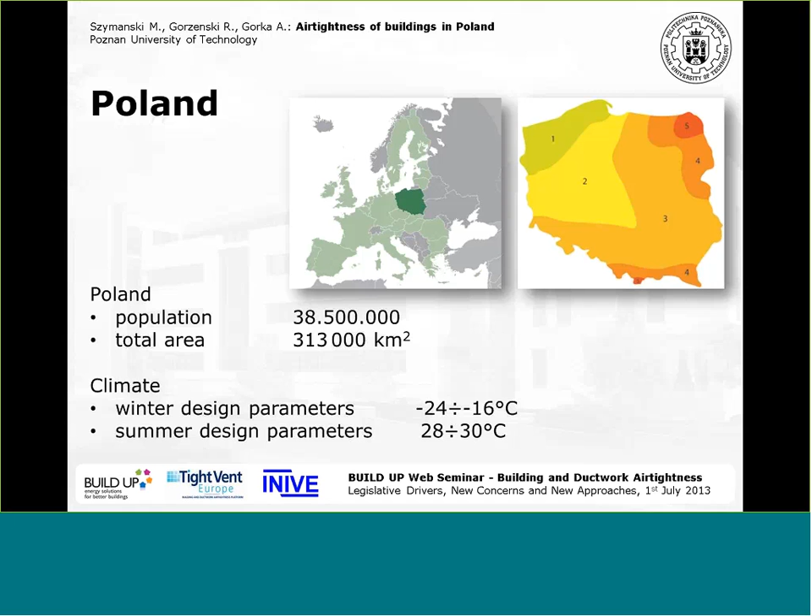We are from Poznan, that's the western part of Poland. The city has about 600,000 citizens. We represent Poznan University of Technology, which is one of the biggest Polish technical universities with more than 20,000 students. We work in the Institute of Environmental Engineering.

Our staff took part in the IEA Energy Conservation in Buildings and Community Systems, that's Annex 36, in the years 1999 to 2003. And also Polish EPBD calculation methodology was developed in 2008 in our institute.

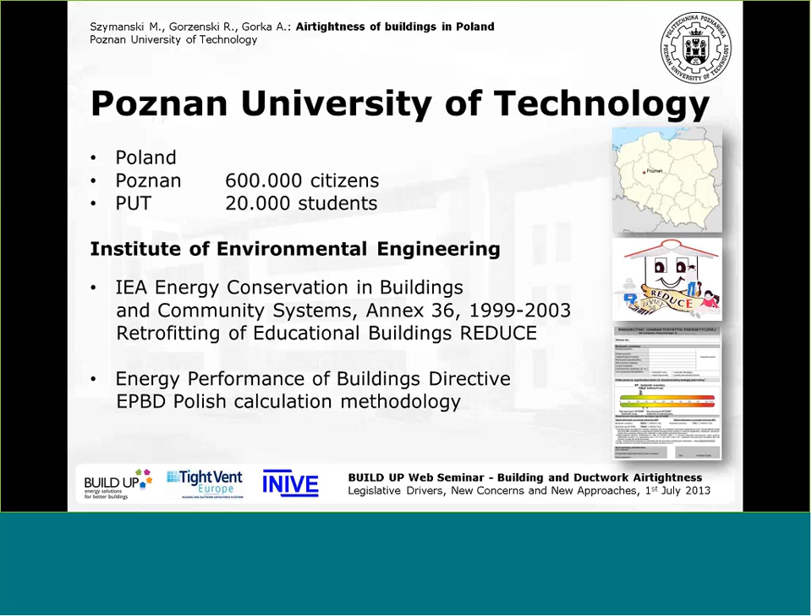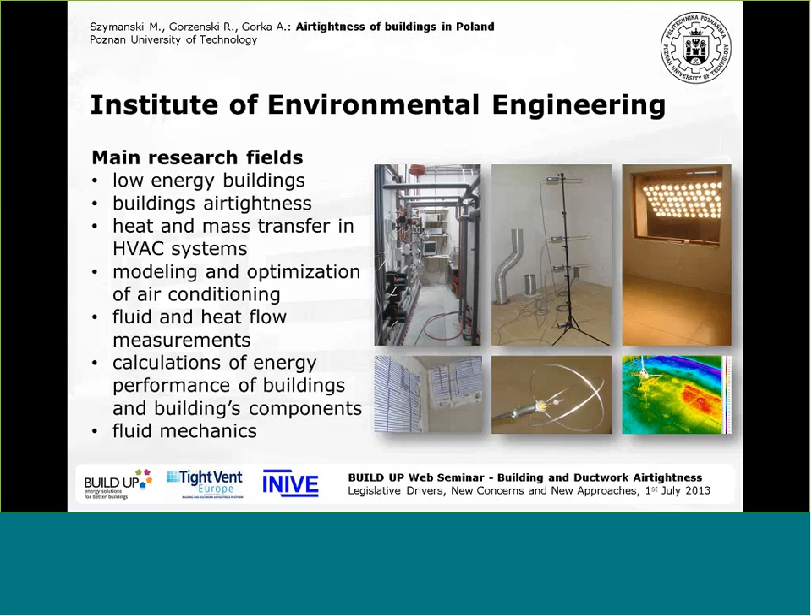We carry out basic and applied research in the areas of low energy buildings, building airtightness, heat and mass transfer in HVAC systems, modeling and optimization of air conditioning, fluid and heat flow measurements, calculations of energy performance of buildings and building components, and also fluid mechanics.

Airtightness measurements which we conduct are often done by the Passive House Center, which is a part of the Institute of Environmental Engineering. It's co-funded by the Polish Passive House Institute. The most important tasks of the center are courses, trainings, energy performance calculations, and measurements.

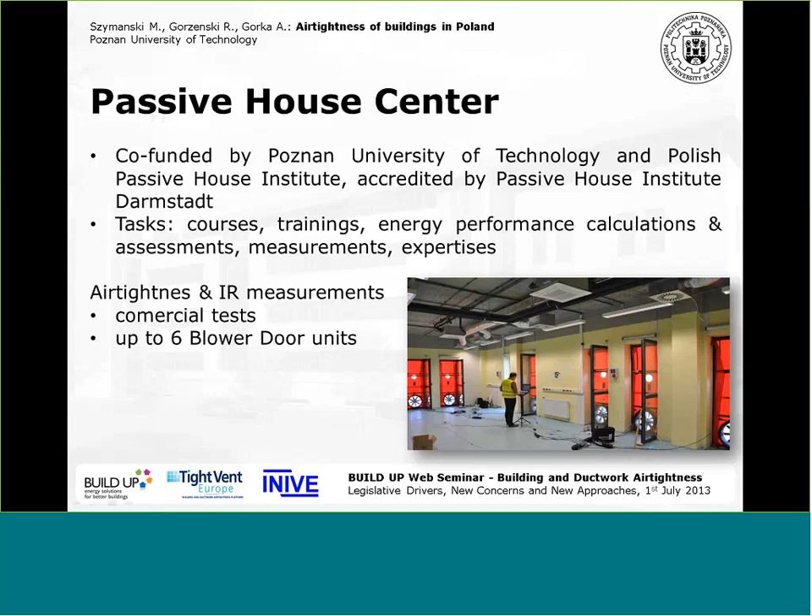Although we do commercial tests, indeed we are not a typical testing company. Airtightness tests are only one of many other activities we undertake. In Poland till 2008 we had no special requirements, which you could observe in a table presented by Rémi. I mean requirements for airtightness of whole envelopes.

Since then, together with EPBD implementation, new building codes were set. Measurements at the moment are not required, they are only advised. But the N50 values are required. That means that no one has to measure airtightness of the building, but if someone measures it, the N50 value should be less than 1.5 air changes per hour for buildings with mechanical ventilation and 3.0 air changes per hour with natural ventilation.

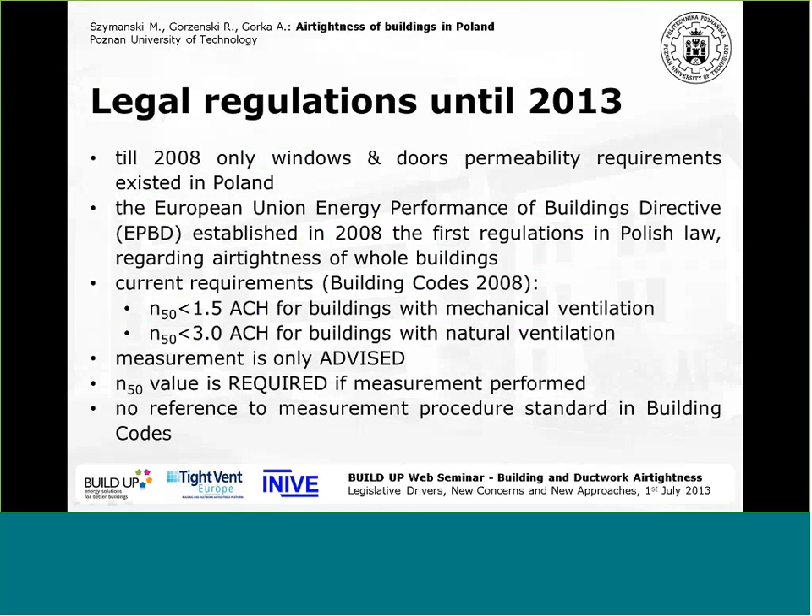Building codes which are planned to be published in 2014 will not change the N50 limits. It will make the standard EN 13829 a reference norm for airtightness testing. But a step backwards is that the N50 values will be only advised, no longer required as it is today.

There are some other guidelines, of course, concerning building airtightness in practice. One of them is the passive house standard. The number of passive houses in Poland is very low at the moment, no more than several dozen, and it is growing very slowly. This year, the National Fund for Environmental Protection and Water Management introduced a new program to

promote low energy buildings. And one of the obligatory requirements for gaining subsidies in this program is to test the building airtightness, and N50 should be less than 0.6 or 1.0, depending on energy standard of the building. There are two standards, 15 and 40 kilowatt hours per square meter a year. Although there is a statement in this fund's rules that the airtightness examiner may be any company which uses appropriate instrumentation.

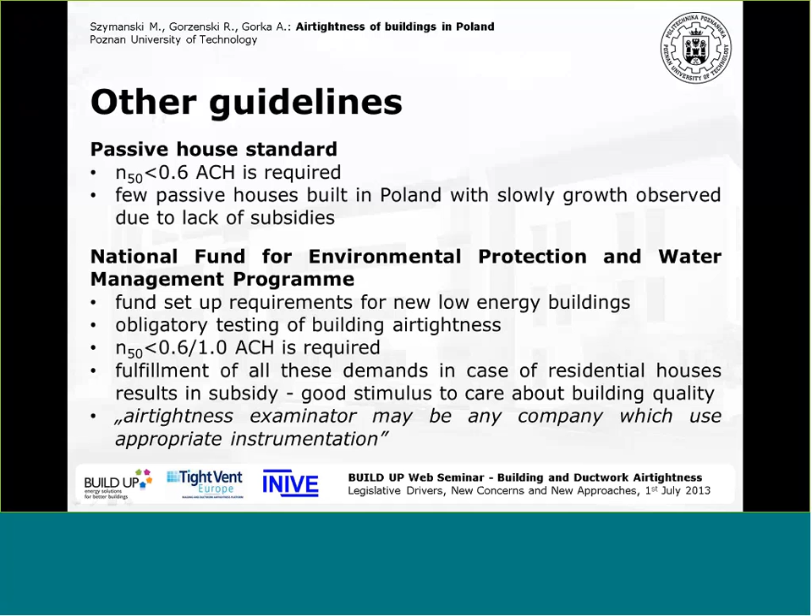And now a few words about testing companies. There is no companies association in Poland, and there is no real communication between these companies. We have no requirements for testers stated.

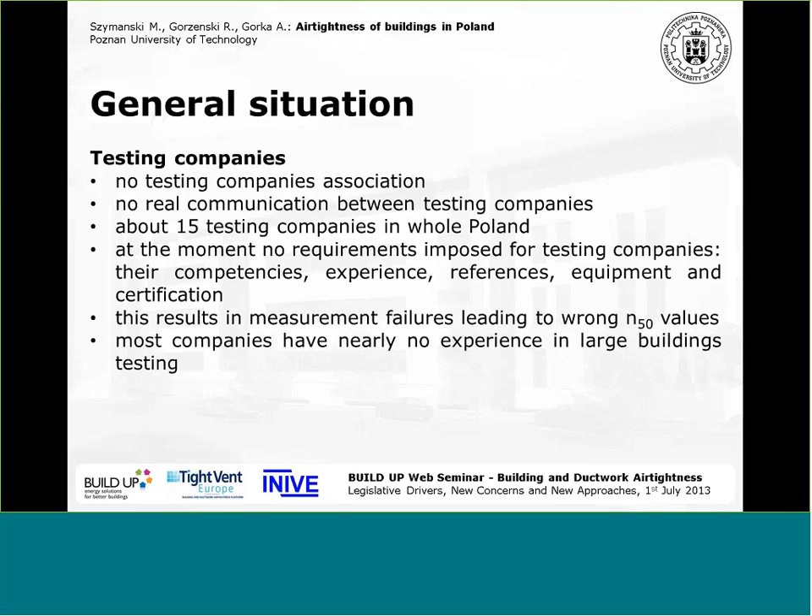They very often have no competencies, knowledge and experience. It often leads to failures during the tests and wrong N50 values as a result. And the worst situation is with large buildings, where there is absolutely no experience at the moment. A good example of such a situation is an airtightness test made in a large aqua park in Poznan, in our city. We were asked by investors to observe the measurements done by the company with complete lack of knowledge in the field of large buildings testing.

There were important measurement mistakes done, like, for example, transzonal uncontrolled flows during the test because of no simultaneous pressurization of adjacent zones. In other words, flow measurement was performed with unknown accuracy. The air handling unit manufacturer didn't provide any reliable data in this matter. The testing team was not familiar with the building and its design. Tests were conducted with several ventilation systems operating, and the systems were not involved in the test. And we found big differences in N50 results, like, for example, at underpressure 1.9 changes per hour and 3.0 at overpressure.

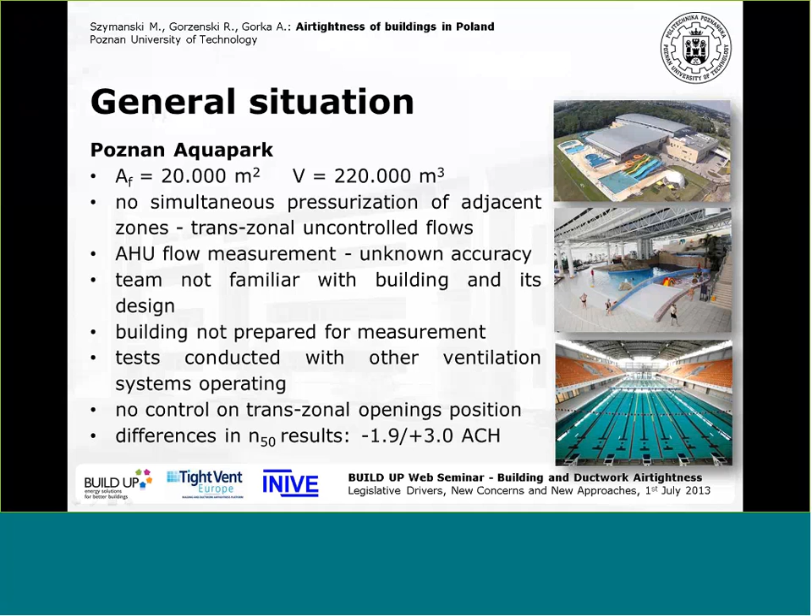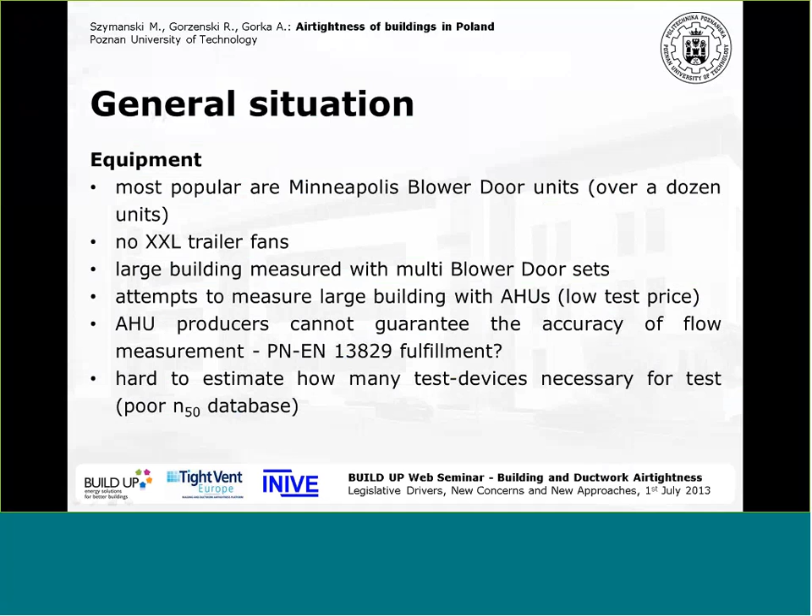In Poland, the most popular blower door test unit is the Minneapolis blower door. We have no large fans at the moment, so there are some attempts to measure airtightness with the use of air handling units. The biggest problem with such tests is that we do not know the accuracy of the flow measurement on air handling units. We try to ask some manufacturers, and each time we get no clear answer in this field.

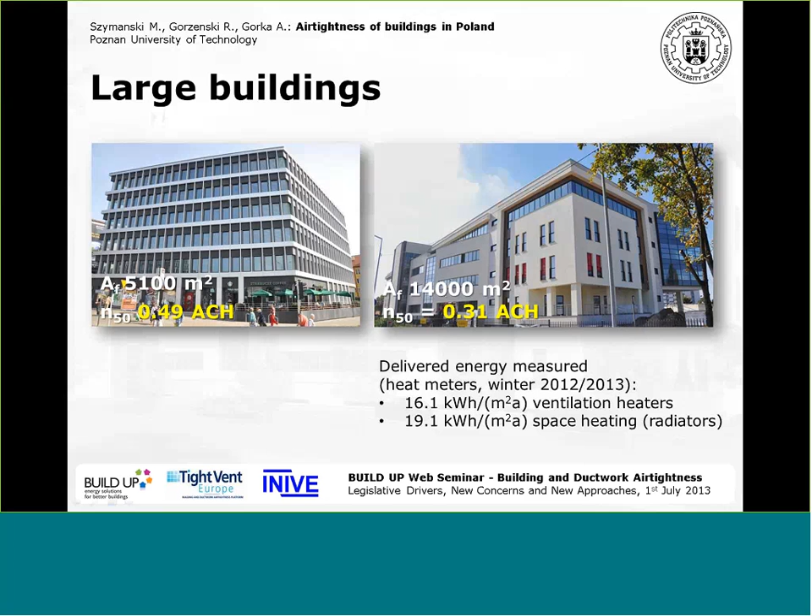At the end, 2 examples of large buildings airtightness tests we conducted in the last 2 years. The first one is placed in Szczecin, that's the northwest part of Poland. Quite good result, 0.49. And the second one on the right-hand side is our Poznan University of Technology Mechatronics, Biomechanics, and Nano-Engineering R&D Center, just built with a special concern to airtightness. It was not intended to build a passive building. It has rather high ventilation air rates and a lot of laboratories. And the N50 is very good, as you can see, 0.3. And the energy consumption is far better than was required in the tender specifications, so it's better than we planned it.

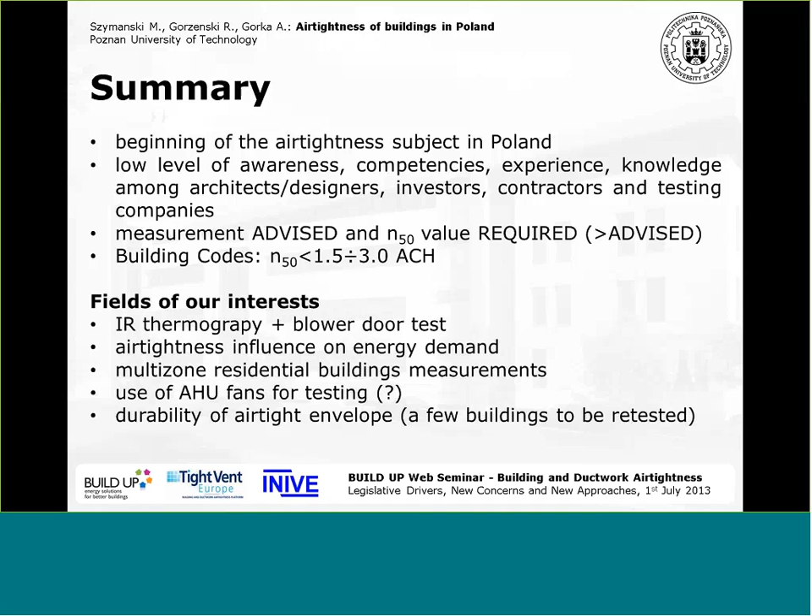To sum up, we observe in Poland a low level of awareness, experience, and knowledge among architects, designers, investors, contractors, and testing companies. At the moment, tightness measurements are voluntary, but N50 values are required, but next year they will be only advised. The requirements are N50 values of 1.5 and 3.0 changes per hour, depending on the ventilation system, of course, mechanical and natural. The fields of interest of our works are synergy of airtightness and infrared thermography tests, determination of airtightness influence on building energy demand, multi-zone residential measurements, use of air handling units for testing, and of course durability of airtightness.

Airtight envelopes. At the end, some plans of the Passive House Center in cooperation with our Institute of Environmental Engineering. We are going to organize, as far as we know, the first scientific conference in Poland in the field of building airtightness. We want to try to establish a testing companies association, to lobby for setting requirements for testing companies, and to carry out training courses for new and existing companies.